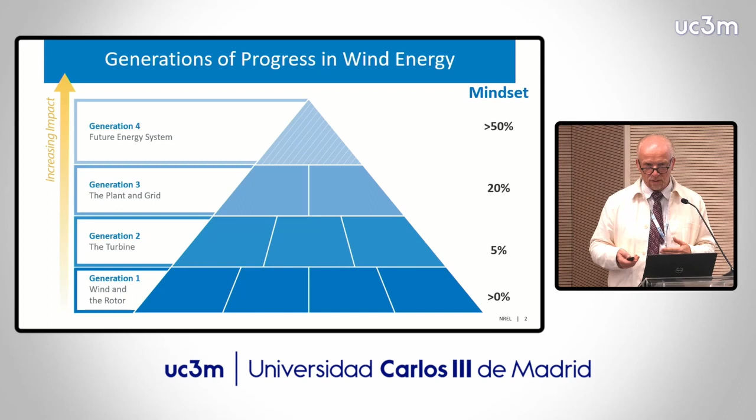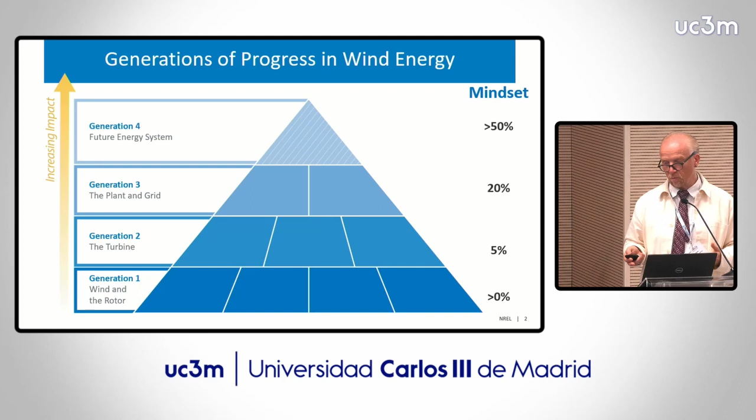Four different generations, not necessarily generations of technology, but generations and eras of research have been identified. The first one: the wind and the rotor itself, turning flow into torque. Next one is the turbine as a system. Then we move on to the plant, interaction with the grid, and later on, future energy system. On the right-hand side, with the mindset, you see the ambitions that these different eras or generations have in terms of desired contribution to the total energy provision in terms of electricity. So generation 1 was about getting it to work, but now in generation 4, we really want to drive the energy system. Let's look at these first generations.

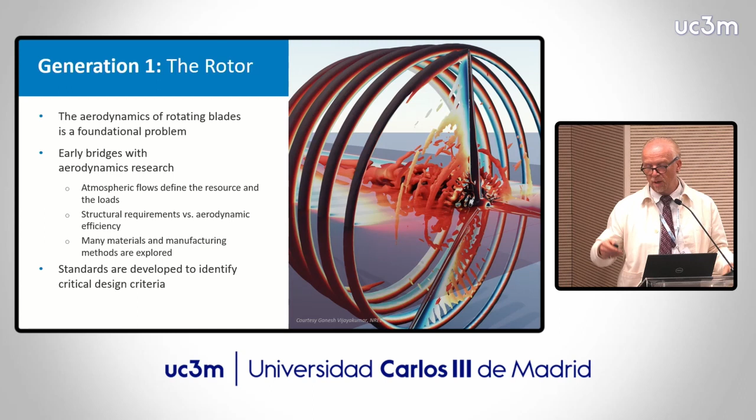So as mentioned, the first one is the rotor. It was all about aerodynamics, about flow conversion, energy conversion, and additionally some early standards and some early codes. Make it work, make it survive was basically the essence of it. However, as you see on the right, this simulation is not from that era, which also makes the point that we're coming back to later on: that we still, at these generation 1 issues, still need to work on them, still need to improve our tools and progress on them, as everything that comes after builds on it.

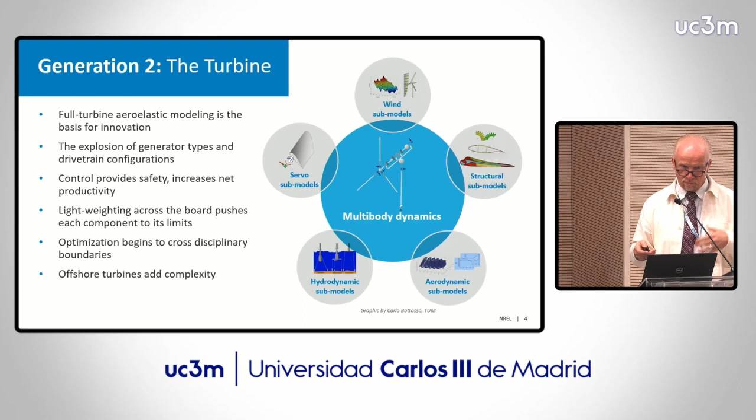Generation 2, the turbine. Now we have a multidisciplinary, multi-subsystem, highly interactive system. So we have wind models, we have structural models, we have aerodynamics, we have hydrodynamics as we go into the water, we have multi-body dynamics, and power electronics and control and servo motors. So here, this generation had the goal to optimize the interacting system as a whole and bring the costs down so that things become not just commercial as a product, but also economical.

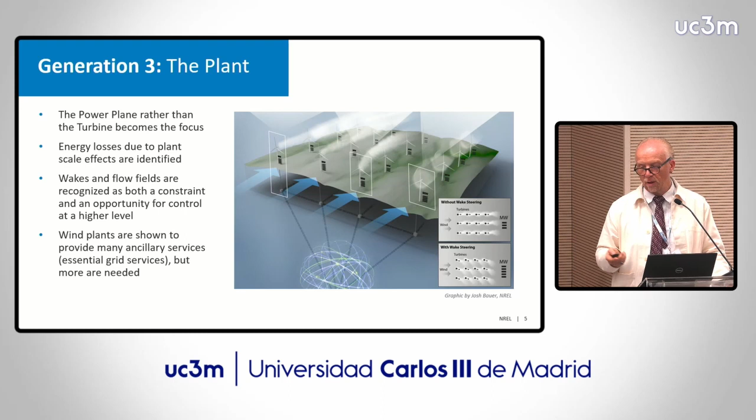So this slide is about saying, hey, when we're going up to 30 or 50% of the grid, we have very different issues. We do not just need to comply with the requirements of the grid as an energy provider and stabilize it. We actually have to run the grid.

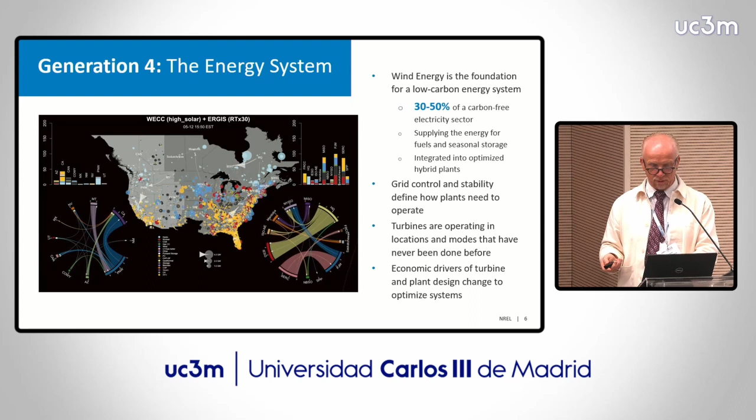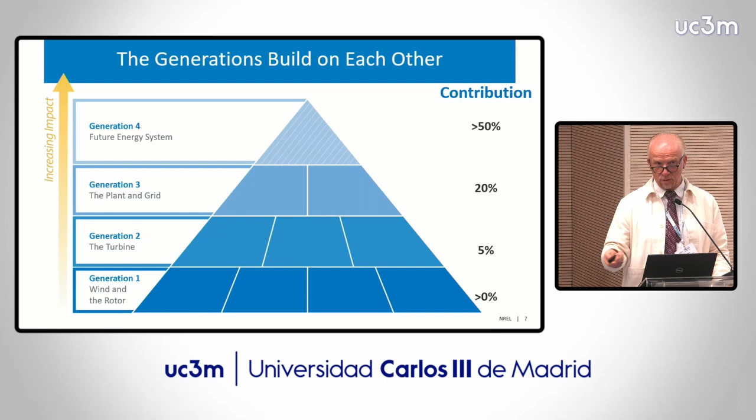So a very different set of demands and tools required. If we can now go back and reflect on this pyramid, we really see the ambition on the right and the contribution that we earlier showed. I think there's a bit more merit behind it now to understand what these generations mean.

Back to the point that we still have to work on the earlier generations as well. Paul told me that in 1981 at a conference, the understanding was: okay, we understand the blades now, we have blade element theory and a few fudge factors, so we understand these things. There was a reality check in 2000 where different codes were tested against empirical data of a turbine that was not conventional at the time—not 3 blades, no twist in the blades, quite unconventional—and it turned out the simulations were very much off from the results, showing that the tools at the time were not physically bottom-up predictive.

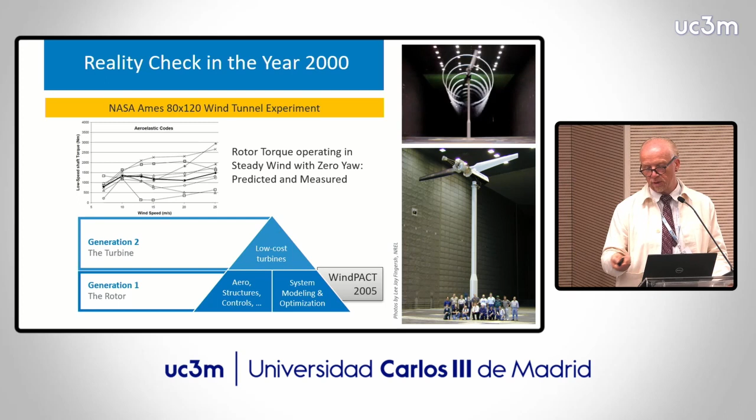They were basically customized to fit the typical design, and then you could vary around with it. So there was another important insight: a huge increase in fidelity and physical accuracy has to be done when you want to optimize systems out of the customized domain. So we still need to work on generation 1 and generation 2, and that holds for the whole pyramid. We really have big gaps. The depth and the scope has increased, but the funding has not. So there's a lot of gaps to fully implement this vision, to have generation 4 driving the energy system, and now on top of it, carbon-free operations to build up.

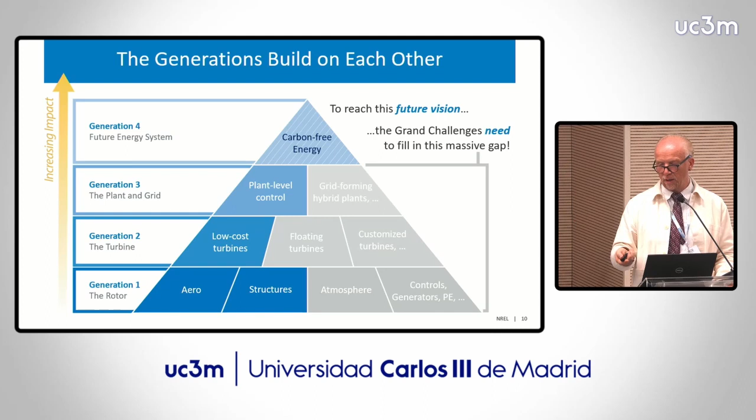So we need these to come in, and these are a few themes that I envisaged to underpin this, to achieve the grand challenges. We can go into these a little further. But first of all, we need to realize that the grand challenges expand from the global weather system right down to the minutiae of material science, subsystems, components, all sorts of flows in between—information, forces, energy, everything. So it's hugely complex.

To realize the carbon-free energy system, we have identified different themes: the physics in the atmospheric flow, the system dynamics, but also the grid and the optimization of all of it together. Digitalization is a hugely important aspect, and also, because we're thinking about new problems, education and the overall system perspective.

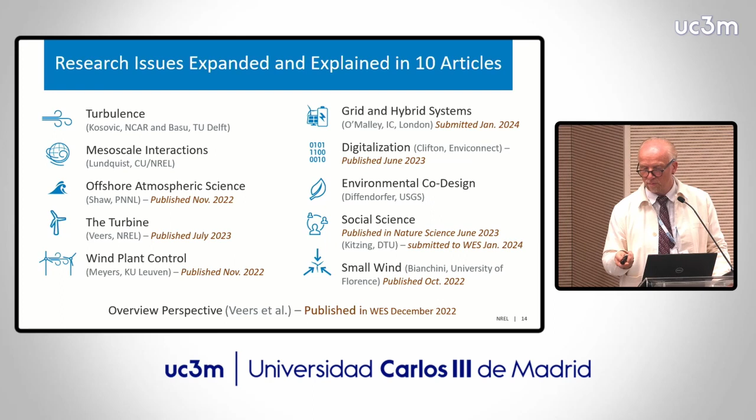We now have a quick run through what kind of themes and topics are required to be dealt with in order to achieve this 50% supply to the global electricity. There are relatively recent publications, within the last 2 years, about all of these 10 themes, and overview papers, also very recent from Paul—I'm sure he's involved in many or all of them. Let's just go slide by slide through each of them.

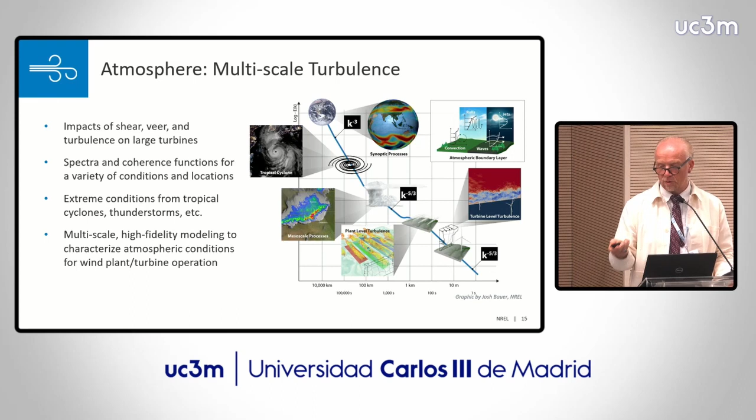So, atmosphere turbulence situation: we have multi-scale turbulence problems. You see a diagram with logarithmic rough orders of magnitude in time, scale, and energy content in these turbulent situations. Particularly the middle ground is not very well understood, so there's a lot that needs to be done here.

Then we go on to atmosphere mesoscale wake. Now this is not the wake of the wind turbine within the field, it's the wake of the plant itself—a bit like the inverse. Instead of looking at complex terrain and what the inflow conditions to the farm are, which we've been trying to do for a long time, this is now looking at what the consequences of the flow through the wind turbine, through the plant, are onto the environment. You see complex terrain here, and the moving parts are the flow fields and the wake of the plant.

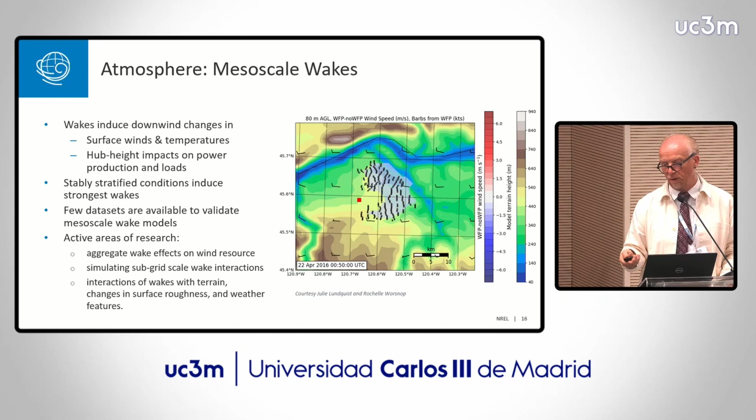In the next one, we have the offshore situation. There's quite a few things different, maybe more than one would think immediately. First of all, we are in a situation where marinization of the system is required—you might have to have an air conditioning system on the machine and things like that. But also the flow fields are quite different: there can be more shear, we have a microclimate on the coast, and wind directions can be much more variable. So there's a lot of things to be considered in this situation.

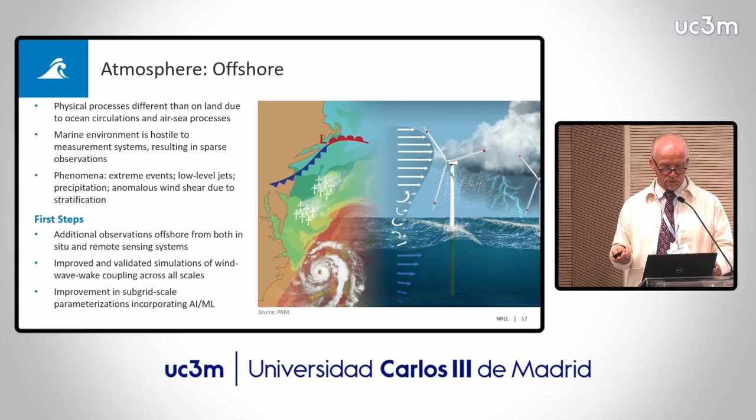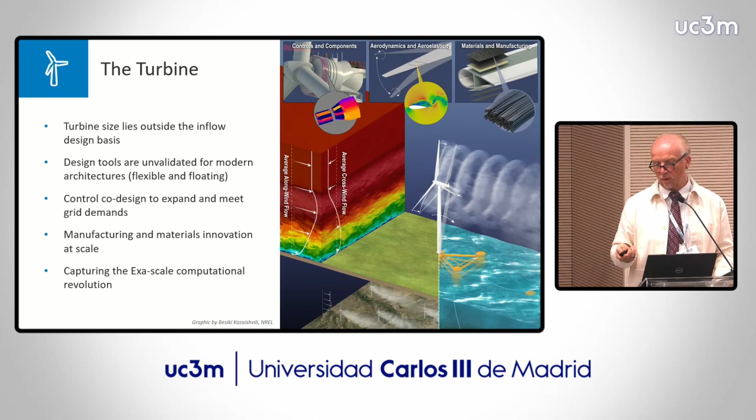When we move to the turbine and look at developments—turbine sizes are larger, turbine hub heights are higher—it turns out that codes written for the lower layers are not actually valid anymore, so the load conditions are different. At the same time, the system is more optimized, so this optimization goes deeper into the system, into control, power and response, right into the generator and the power electronics. Of course, we're larger, so we need aeroelastics and everything that comes with it, and material science. So the interaction and the system perspective is becoming more and more important, and there are several other problems I haven't mentioned here.

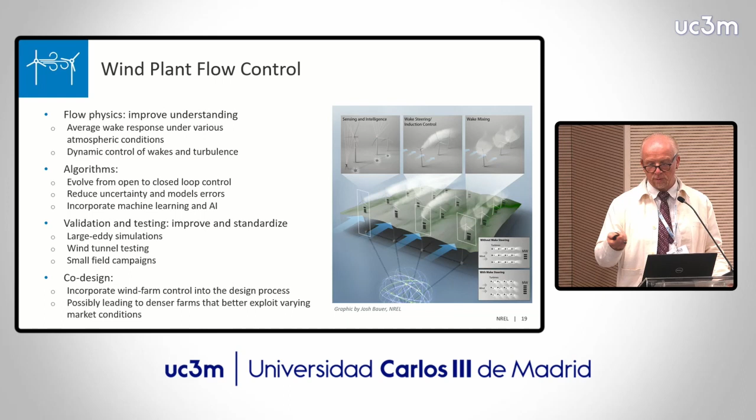On farm, we've mentioned this before, farm control, probably using new instrumentation, not just the instrumentation that we would have on the turbines themselves. What comes with it is also that plants may not be homogeneous. They might have different combinations of turbines. And of course, we need to look at algorithms, and in validation, we have very little data for these situations.

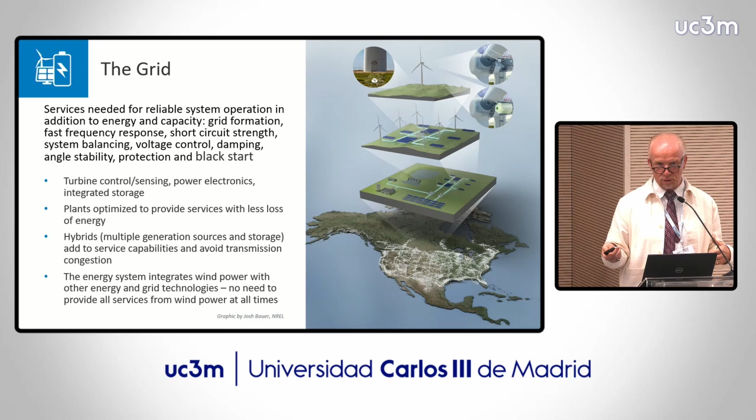to tune those models. Grid, and again here, hugely interactive. So you see the grid at the bottom, then you see plants, maybe hybrid plants, or you even could have to consider fleets of plants that power the grid. And that goes into the control of a plant itself and into the machine, and even into alterations in the machine, like having storage on board of the machine. That was done. It hasn't taken off, but it was at least considered.

And then digitalization, of course, there is a lot of data around within the individual machines. Unfortunately, it's not standardized, it's not accessible. So there's a lot of knowledge that is not being tapped into, and you'll get a great insight from Sarah later on this topic. And co-design of environmental aspects. I like the word co-design finally applied to the environment, with the hope that we maybe can improve even something.

What's critical here is that if we move on to a penetration of 30 to 50% of renewables, so of wind, the currently possibly acceptable interventions into nature with bats being struck by wind turbines will not be acceptable anymore, because the bat population doesn't increase with our penetration of the grid. So there has to be a much harsher implementation of environmental compliance, and things need to be taken into account, for example, in particular terrains where eagles take the updrafts, so make sure that these are not being interfered with.

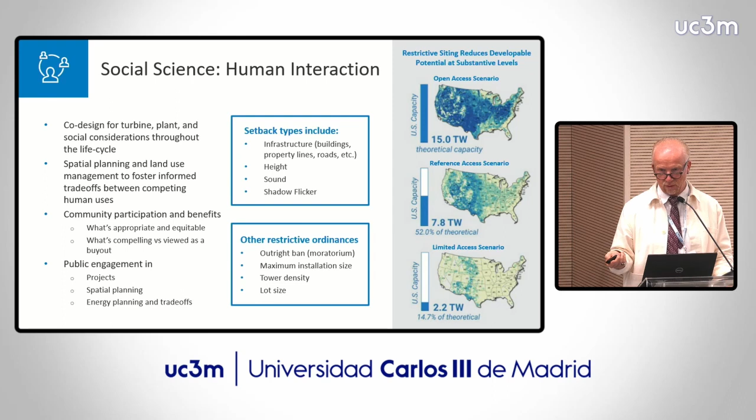Social acceptance, of course, hugely important when we've come to higher penetration. On the right-hand side, you see 3 estimations for total capacity in the US, and the only difference between them is the setback from turbine to turbine, and from turbine to the next infrastructure, like houses and things you need to stay away from, also associated with height, flicker, noise, and multiples of rotor diameter. So depending on how harsh these requirements are, you can drop down to 15% of what you could ideally get with short setbacks.

And small wind turbines have been kind of neglected in the research that's been done for them. Of course, there's less capital behind it, but they need their own tool development, their own technology development. They work in different conditions, they have different clients, they have different requirements of lifetime, there are different O&M situations, so they're basically a different technology that needs its own technology development roadmap, its own tools. And that absolutely is, of course, totally the case for airborne wind.